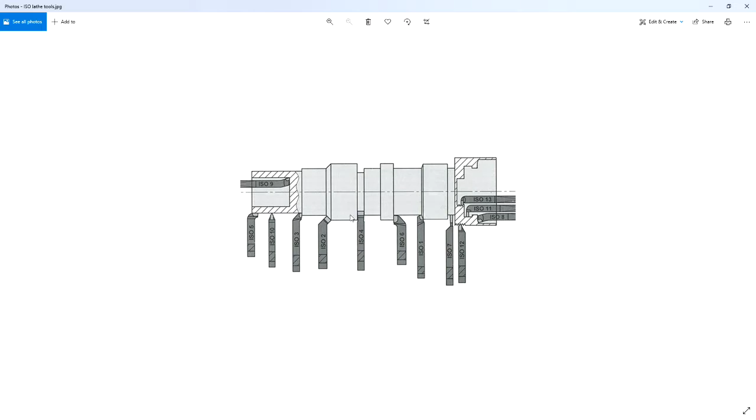Here's some standard ISO profile tools. It's International Standards Organization. And when this was developed, the tools were permanent. You had a permanent tip that's brazed onto a shank. Technology's changed, but we've taken the same nomenclature and profiles off here. The negative rake indexable tool bar.

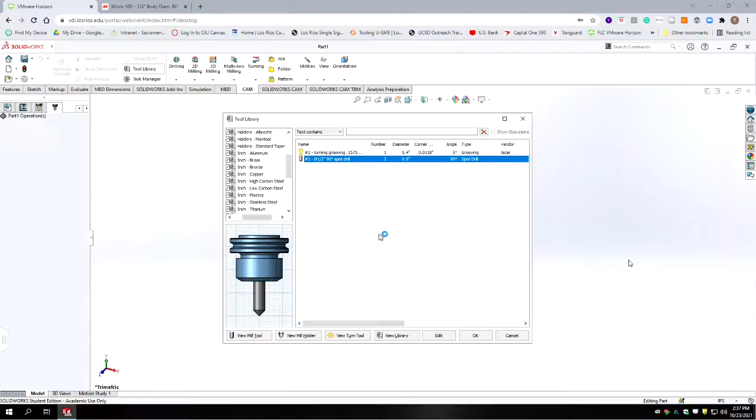Okay, and so this is the part number, and this is actually for the insert. And then this is for the turning tool itself. So let's go to the turning tool, and it's a fast little hop to what the catalog looks like. And let's look at the catalog.

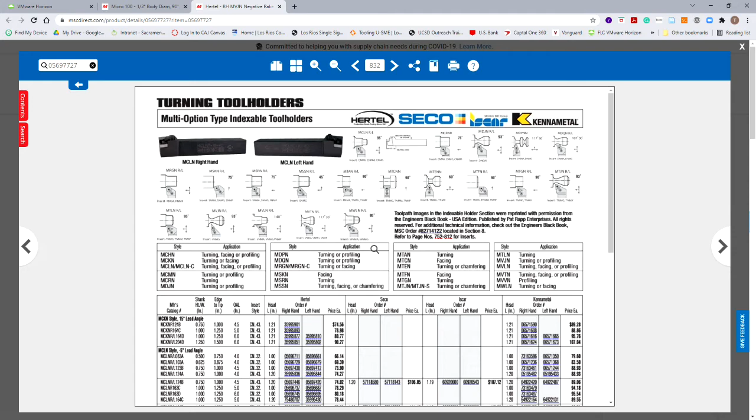Up here in the top shows all the different shapes for these standard cutters. And so what we have is this is one with a round insert to make profiles. This one only cuts on the face with a square diamond shaped insert. Here's the same insert but at a slight angle. Here's one going in 90 degrees.

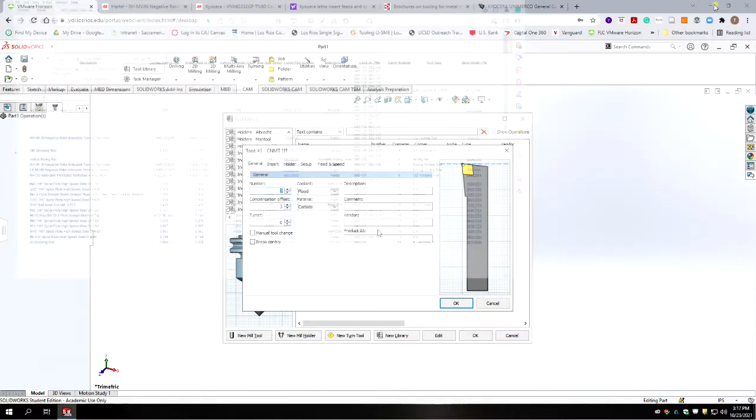And then we're putting in the tool description from our spreadsheet. Okay, it's tool number 3. We use flood coolant, it's carbide material. Offset number 3. We're going to put in our description. We're going to trim this down. So it's a right-handed MVJN.

We're just going to put indexable turning tool holder. So tool holder. Vendor is Hertel, but our insert is a different brand. The Hertels weren't available. So let's put the product ID of our tool holder. We're going to call this the OD turning tool.

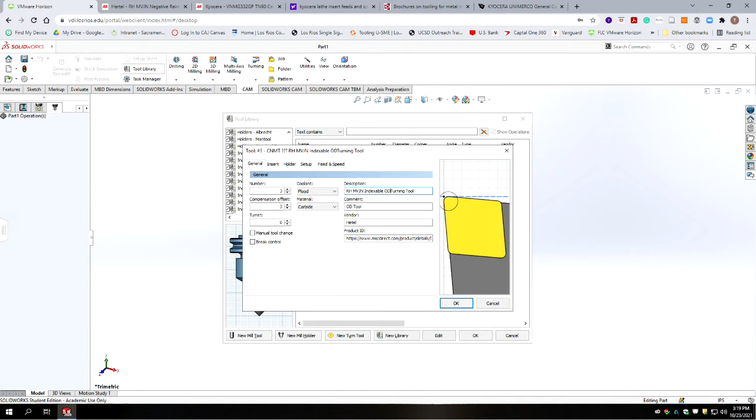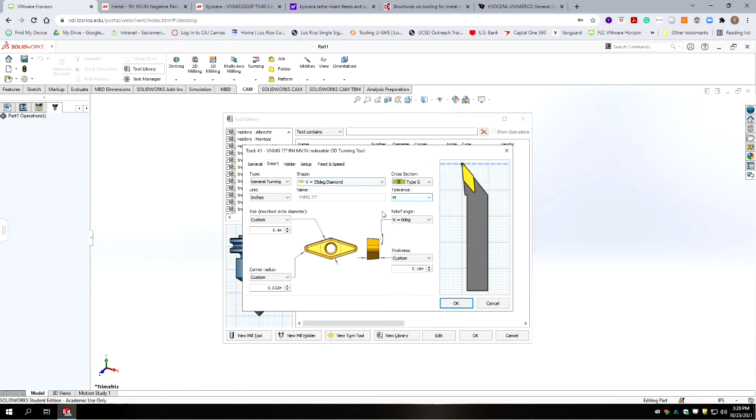We're going to go to insert, and we should be able to plug in the letters and get most of this. So we are using this VNMG 332 general purpose insert. It's diamond shaped at 35 degrees. The type is general purpose. So it's a VNMG insert with a

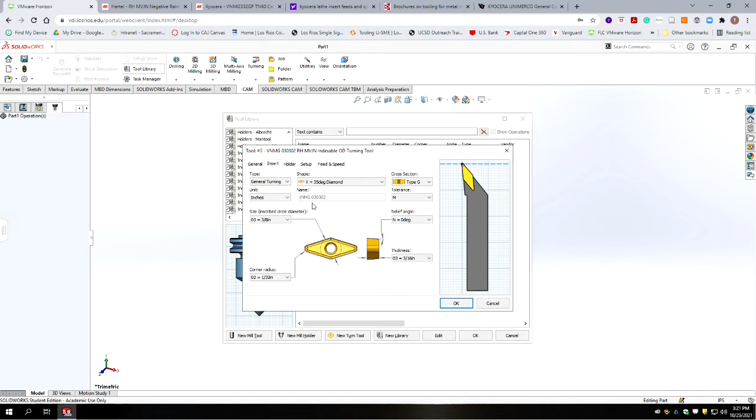3/8 inscribed circle with a 1/32 nose radius and a thickness of 3/16. So that gives us a VNMG 332 insert, which is what we have here. They drop the zeros. So it should have 2 cutting edges here. It can be flipped and rotated 180 degrees for 2 more edges on the opposite side of the insert.

Okay, we're going on to our holder. We're using a multi-lock. Starts with an M. It's an MVJN holder, so we want that to match. Right now we got MVL. We're going to change L to J. Gives it -3 degrees of lead-in angle. And N was the last letter, and it's right-handed, so that's what the R stands for.

Okay, so now we're going to put in our dimensions here. So we need to go back to our specs. Let's start with our overall length. Our overall length is 5 inches, so we're going to put in 5 there. And our shank height is 1 inch. And our shank width is also 1 inch.

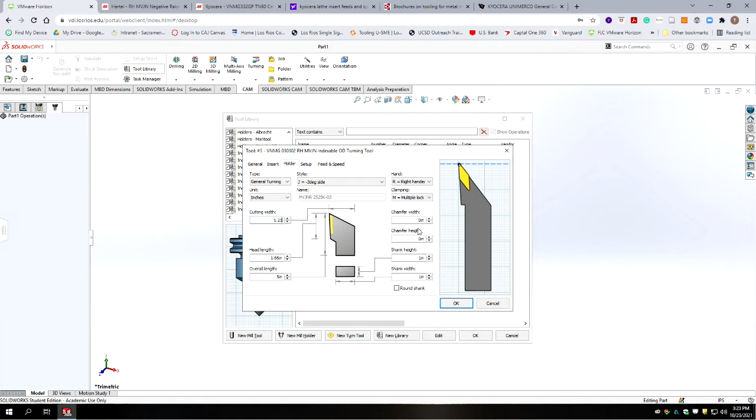Now the head length is 1.66, and the back of the bar to the cutting edge is 1.25 inches. So we're going to put in the head length of 1.66 and a cutting width of 1.25. And that should look, in general, pretty close to what our holder is going to look like. I'm going to leave the chamfer width and chamfer heights alone.

I'll go to setup. It's pointing the correct direction. It's going to be facing the spindle. And compensation is going to be tip tangent. And on feeds and speeds, we're going to select constant surface speed, and so that'll change the RPM of the lathe, and our largest diameter is going to be 2 inches.

Okay, we're going to set a constant surface speed of 500 feet per minute, which is moving along pretty well, and so that means that the stock diameter of 2 inches, which is our maximum part size, will have a spindle speed of almost 1,000 RPM. But as it goes closer and closer to the center, it's going to increase that RPM to keep the constant 500 feet per minute with this cutter. And we'll see how that goes.

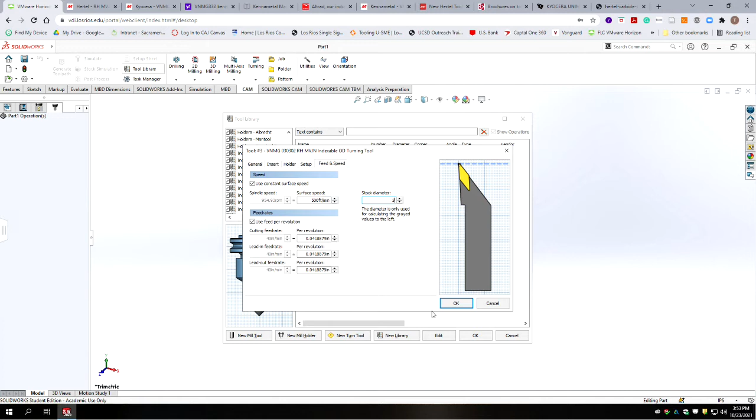And then we're going to hit OK. So we've just created tool number 3. Now we're going to use this tool in a couple other capacities. So we're going to be able to copy this tool to make up a couple other tools, so we'll move along a little faster. And then we're going to do the same thing with our drill bit. We're going to just keep copying that tool, and it'll keep its information. We'll change the stuff that's different.

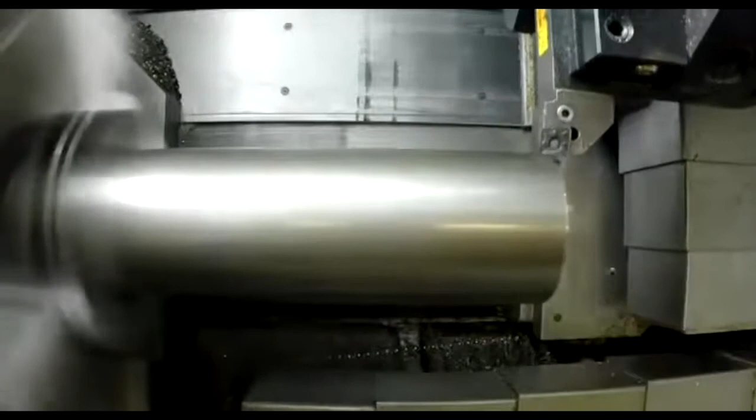And they're using that to rough away the material before the tool we chose comes in and cuts the rest of the part to finish size. So it's doing a facing operation, and now it's going around to the outside edge and doing an operation on the outside diameter. So this would be considered a radial tool because it faces the radius of this cut.

Now you'll notice, you might have heard the RPM changing pitch as the cutting goes, and that's because the RPM of the machine is changing speed based off the diameter that the cutter's cutting, so that the surface finish footage is the same. You get a consistent finish no matter what diameter.

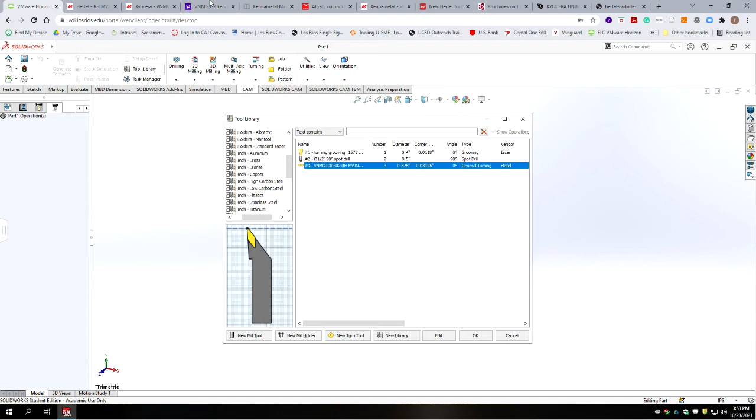We're moving on to tool number 4. Tool number 4 is a grooving tool. It's an outside diameter grooving tool, so OD grooving tool. We're going to copy that description, and we're going to create a new turning tool. And under general, our description is going to be OD grooving tool. We go back to our spreadsheet, and the vendor is Gühring, and we're going to go ahead and go to MSC and see what we selected there.

So it's a solid grooving tool. It's like a boring bar, and we're going to use this on the outside diameter to make the 1mm slots on the outside, I believe. So let's go down to the specs. We should have all the specs here. And we got our overall length. This tool is metric, so all the numbers are going to be in metric.

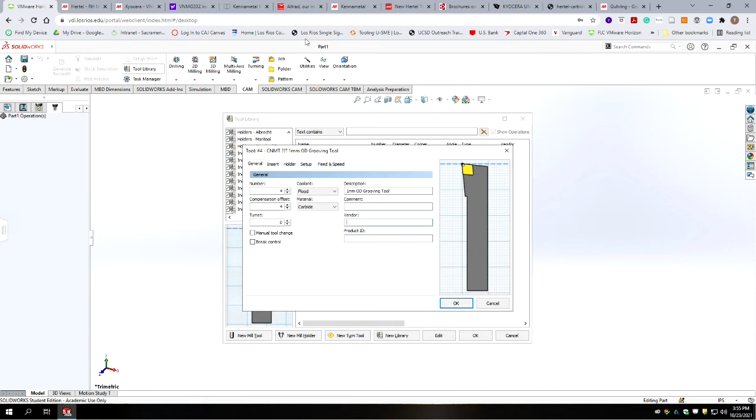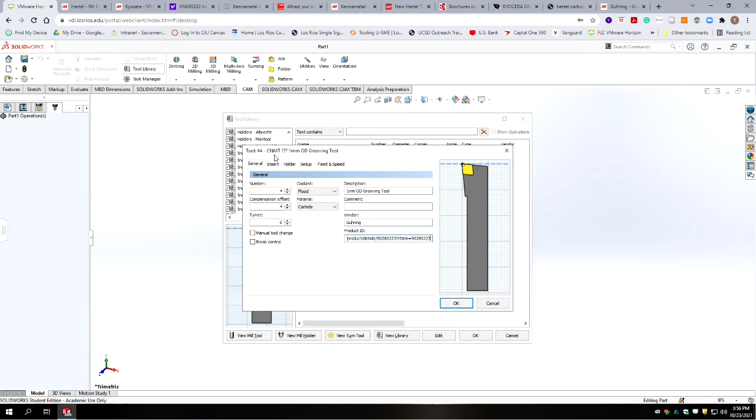Okay. Tool type is a grooving tool, and we have a square tip. We're not really using an insert, so we are going to use it as an inch tool. What we'll be able to do is you can type in 1 mm, and it'll calculate the decimal equivalent for us because our program's going to be in English.

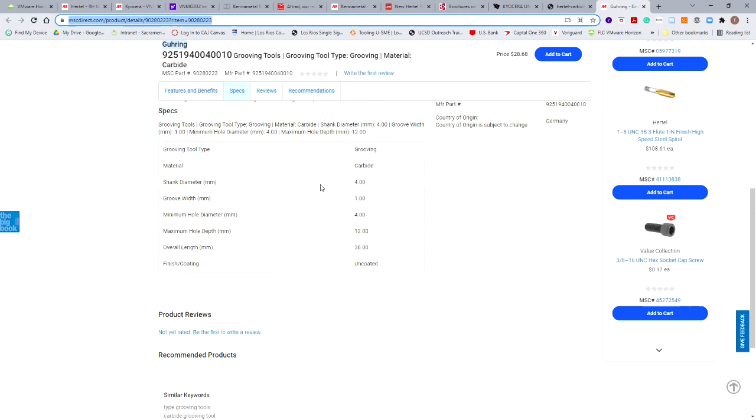So it's a 1mm width, and the corner radius is uncoated. It doesn't say, it must be sharp. It doesn't have a radius on it. So we're going to say that the corner radius is 0. See if it'll accept that. The width on the groove is 1mm.

And our maximum depth, not really sure what to put there. The tool, we'd have to look at their tool catalog. It's not giving us enough information here. But for the purpose of what we're doing with this tool, we're only going 1mm deep. So we're going to put our overall length as, let's put 4mm. And then a head length of 4mm.

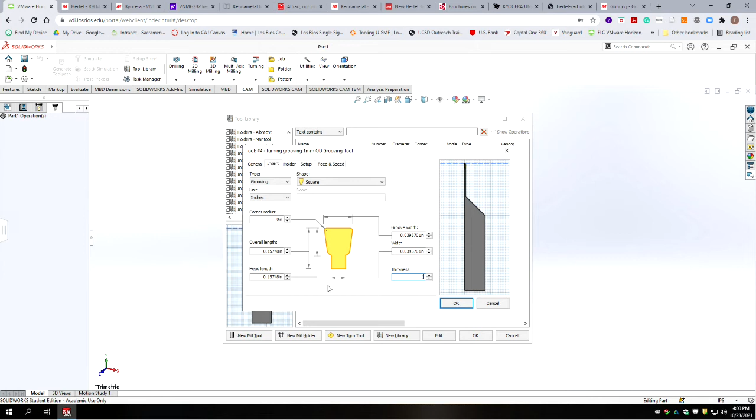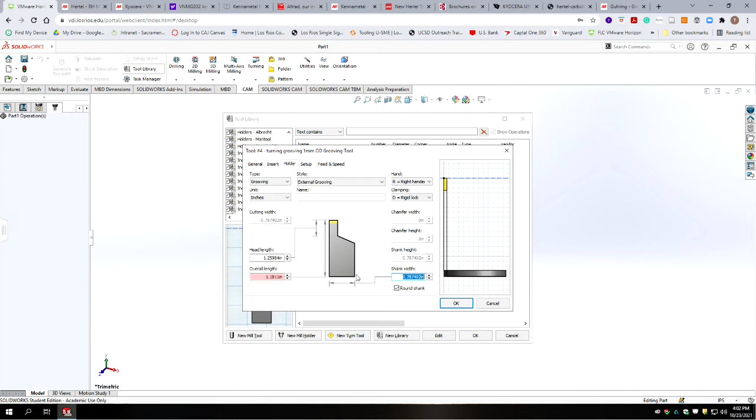We'll put the thickness at 1mm. Okay, we're going to go to the holder—there really isn't a holder, but it's the body. It has a round shank, and it's grooving type, we're doing external grooving. Our overall length was 30 millimeters, shank diameter is only 4 millimeters, it's kind of out of scale here, so the shank width is 4 millimeters, and our head length is 12 millimeters.

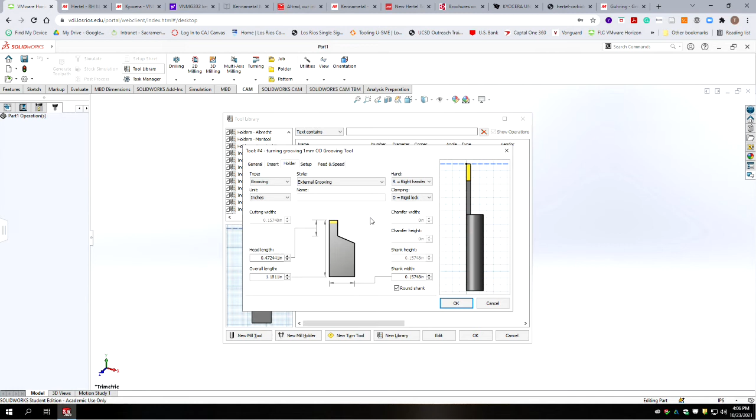So we're not really using an insert, but we've modeled something that's close to the size of it. The critical thing is the millimeter width here. Okay, we're going to go to setup, and this is actually going to face, as we see it here, at 0 degrees orientation to the spindle.

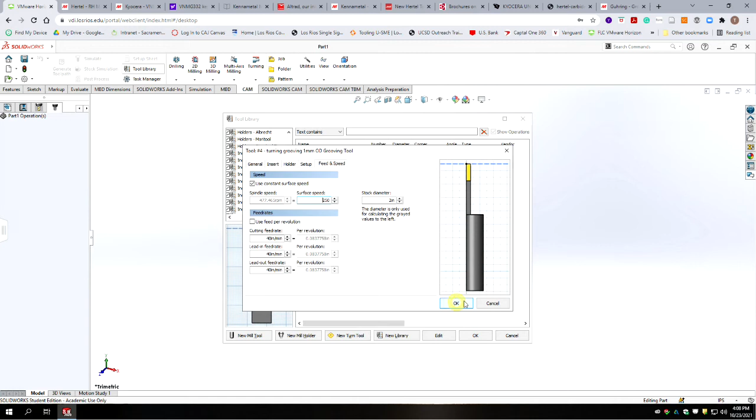Feeds and speeds, I think we're just going to leave this at default. We're going to go to constant surface speed at 2 inches, and we're going to say 200 feet per minute, or 250. Okay, we're going to select OK. So now we got our OD grooving tool. We expand this out, we can see our full dimension. All right, we're on number 4. Okay, so let's go back to our list and see what tool 5 is.

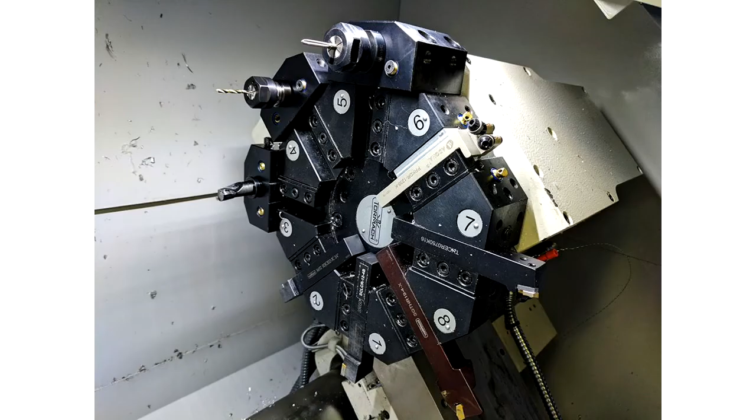Okay, so this tool is a boring bar. I believe it's also a solid cutter, it's not using an insert. Let's go look at what it does. So it's going to be our first lathe tool we're going to do axial moves with though. It's a very small boring bar. If we look at our specs, if we were to look back at our turret, it's going to face forward like a drill bit, but you go in with a drill first, and then you take the boring bar and make the holes bigger.

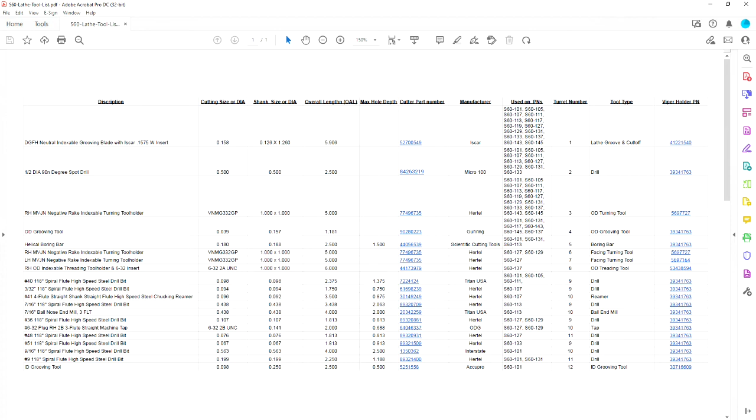This, we're creating a new turning tool, the general type. Okay, so it's going to be number 5. We're making a boring tool. Okay, we're going to go back to our general description, we're going to take that from our spreadsheet. We're doing it's a helical boring bar—just means the boring bar head is a helix.

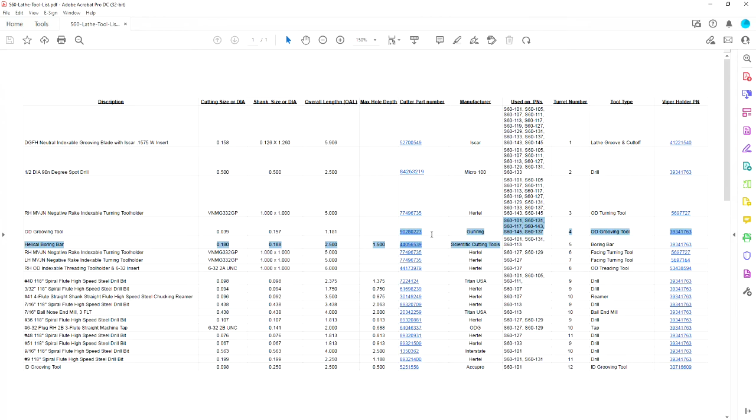The vendor was Scientific Cutting Tools. And we're going to go back and put in our product ID, it's going to be the URL to where we buy it from.

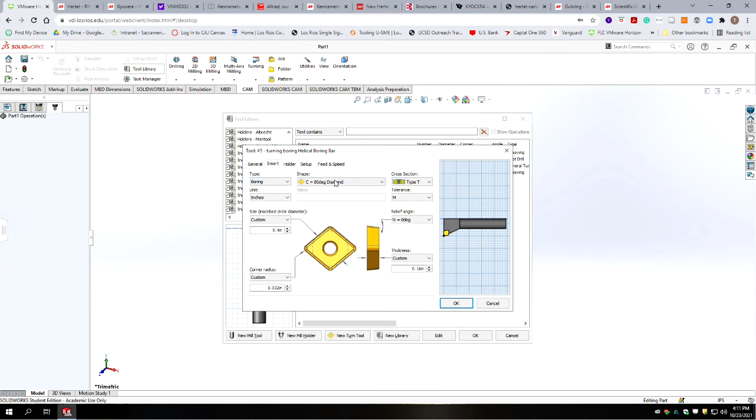Okay, we're going to go to insert. It's not really using an insert, but this is the size of the cutting head itself. Using an insert, but we need to find one that mimics the shape of this. Let's go with a square, since that's as close as we're going to get. And we're going to look at our information. Scientific. Okay, our minimum bore is 180 thousandths.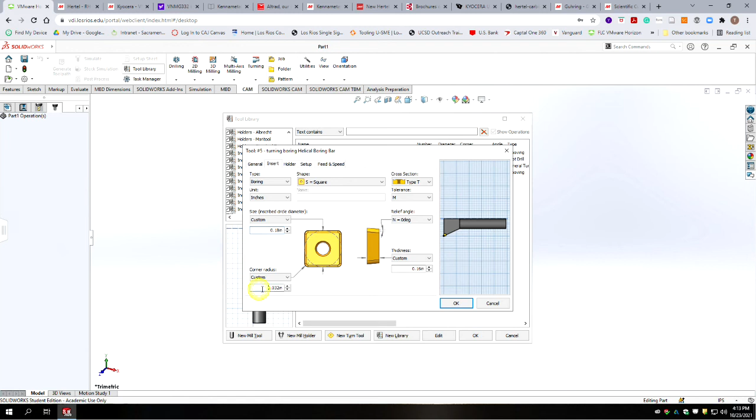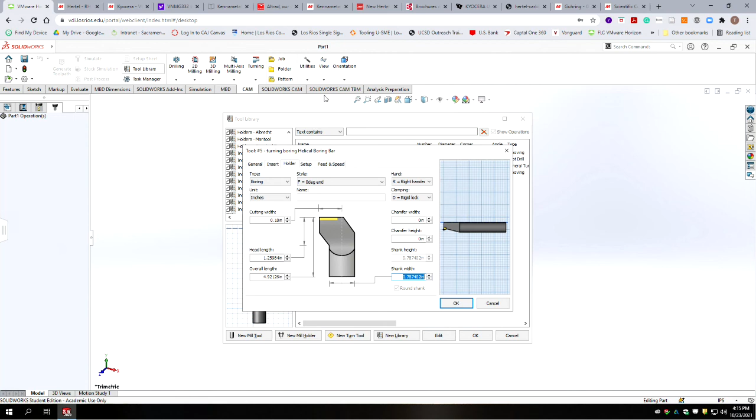Okay, our cutter radius, and now we're going to go to the holder to try to fake the rest of this—180 thousandths, our head height. Our shank width, since it's a round shank, it's a lot smaller than what we got there. Our shank diameter is 3/16. The overall length of our tool is 2.5 inches.

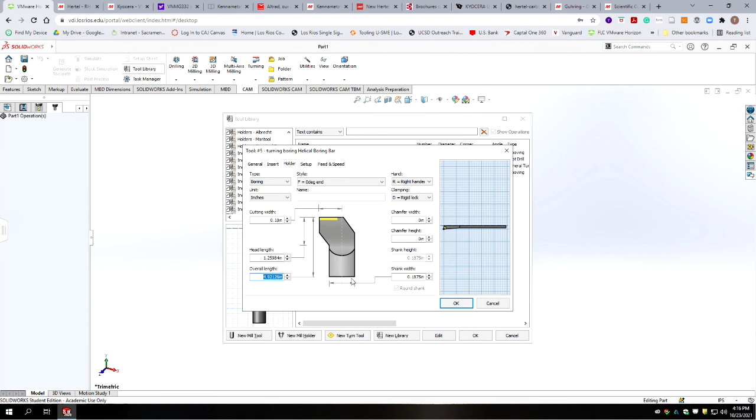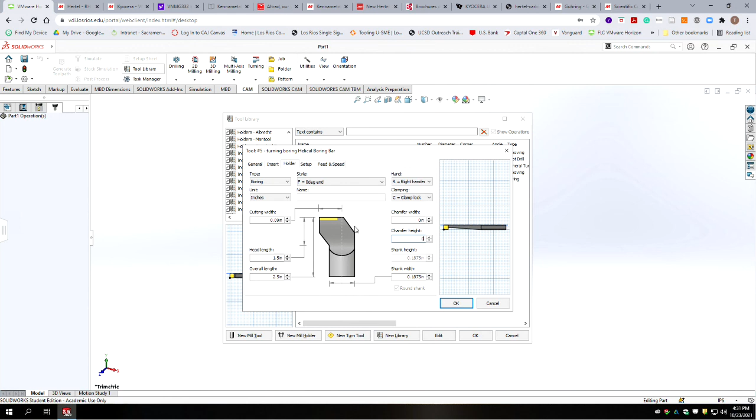Okay, so we're mocking up this boring bar the best we can. This tool is actually set up for inserts, so we want the cutting width to be on center line. What's going to really happen is we're going to set the tool on this corner, and it's going to follow the profile in the program. One thing I see on the shank is it's not allowing us to have a straight cylindrical shank like our real cutter has, so it's going to appear as if it's gouging when it goes into the hole.

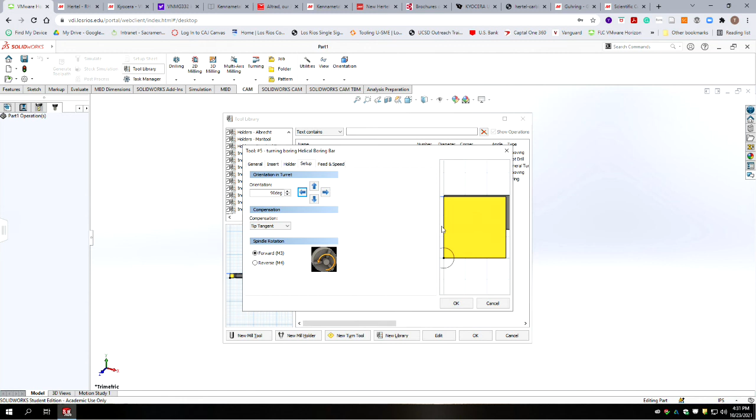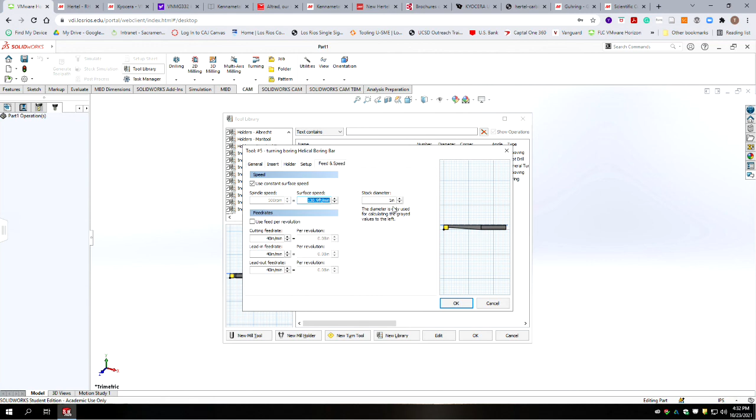Okay, so we're going to go to setup, and our orientation is going to be facing the rotation in an actual radial way. And our feeds and speeds, again, we're going to go to constant feeds and speeds, and I think we're going to increase the surface footage—no, we're going to leave it right where it is. Okay, and 1 inch is about the biggest diameter we're going to do with this cutter, so we'll just leave it at that, and we'll hit OK. And now